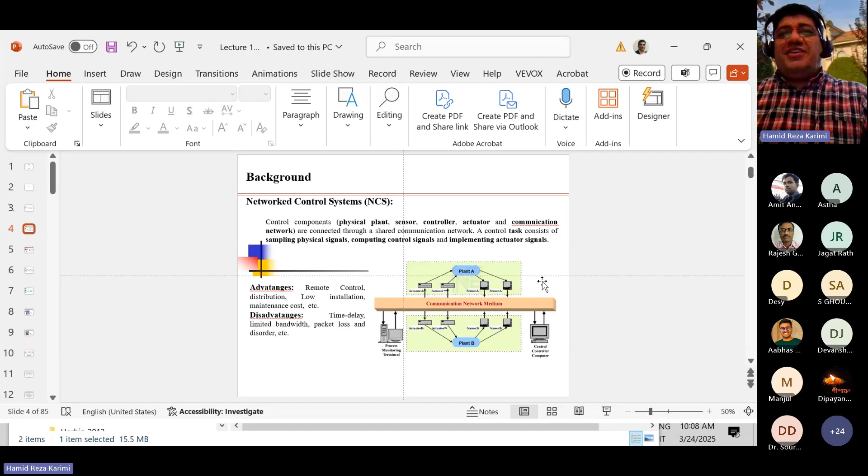Dear sir, you are unmuted but your voice is not coming. Okay, oh sorry. Let me ask you again: is my screen visible and can you hear my voice? Yes, now it is visible.

Okay, thank you. So I'll talk about NCS as a starting point. The NCS consists of a distributed plant and sensor actuator integration. The task of control consists of sampling physical signals, computational control design, and implementing the signal through the actuator as a control input. With this structure of a distributed plant, we get benefits like remote access, remote operation, remote control, distribution of the system, and perhaps low installation and maintenance cost.

Moving to decentralized control in the context of NCS, this is one of the emerging topics. But what could be some drawbacks in the NCS? There could be challenges coming from the networks, including time delay, limited bandwidth, and data sending issues. We should also expect packet loss, disorder, and so on. So the NCS potentially consists of some challenges, and the main research in this context is to mitigate these challenges through different control designs or scenarios.

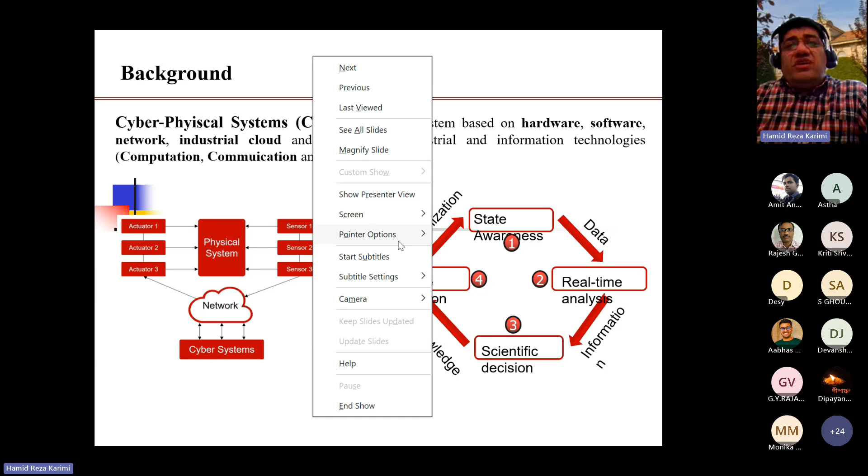The CPS system is also called a basic integration of the physical and the networks. We have issues about computation, communication, and control, very similar to the context of NCS, the network control system. Again, we have sensor positions, sensor selection, and we need to look at the physical system itself.

So the network also exists, and we have issues about cyber systems. If you look at the CPS, first we consider state awareness, data sharing, and real-time analysis, and this information should be sent to decision making for the task of system operation. So how the knowledge can be produced and circulated for better execution or operation of the system.

Of course, optimization is always a concern of the CPS. The circulation of the system operation for the CPS is based on the data, and this data should be transmitted through the networks and other physical aspects, including the sensor, actuator, and also the system itself.

So you can see that this kind of CPS potentially has given a lot of benefits from technology. At the same time, we should have a lot of concern in different aspects. The topic of CPS should be integrated with some other keywords, for instance resiliency and security. These issues become very important from the application side.

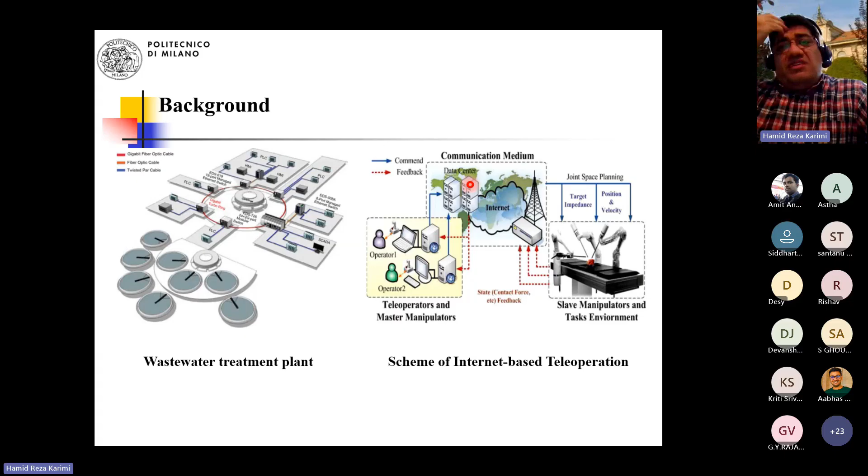In this context, data is transmitted through this communication channel, and we need to look again at the topic of CPS and other threats coming to the CPS, to see how the signal could be healthily sent from the master to the slave part. In all of these industrial applications, the security and resilience of the system is of high importance.

For this aspect, for the NCS or CPS, as we discussed before, there are three components: the plant, network, and control. The plant means we need to have information - information means the modeling. If you have the model of the plant, you can do good analysis for the dynamics in terms of stabilization, and also monitoring of the plant. Of course, this information is very expensive and sometimes it's not possible to obtain it in advance.

So the research in CPS and NCS is moving from model-based to data-driven approaches, and that's what my research group in Italy works on - data-driven control. In this scenario, all the topic of control design should be managed through data acquisition, and this is another research aspect.

The first thing we need to look at is network characterization, including network bandwidth, to enhance efficiency, and also look at some sort of network-induced constraints. Here I'm talking about delay, packet dropout, and quantization - how to sample the signal from the sensor to the network and then to the actuator.

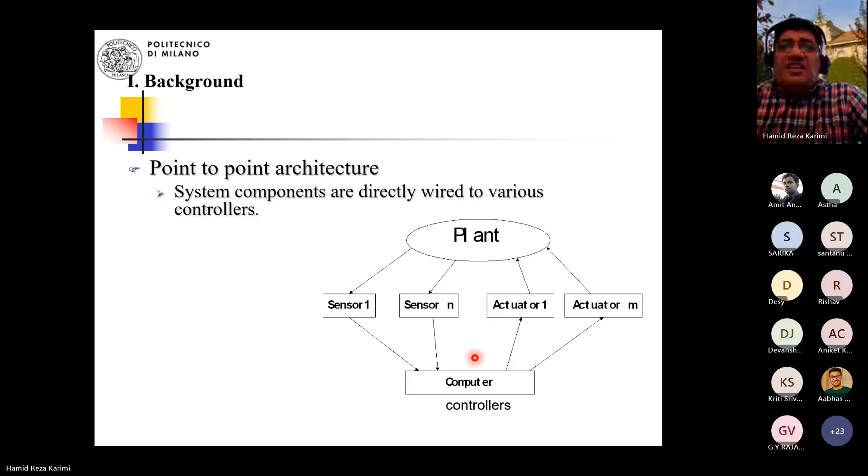Okay, so when we talk again about NCS, as I told you before, we have one part with a plant, a controller, and sensors/actuators. With respect to the traditional approach, we have a point-to-point architecture, meaning the system components are directly wired to the various controllers. This is the traditional wire-based point-to-point approach. But the development and history of control systems moved from analog control, to centralized digital control systems, to decentralized control, and also to fieldbus control systems and network control systems.

NCS as a keyword was introduced in 1998 by Professor Walsh. But already in 1988 we had the integration of communication and control. So the keyword NCS was introduced in '98, but in fact the integration of control and communication dates back to 1988. At that time, they discussed partly digital design, partly analog control, and also completely distributed control — these were some of the progress stages of control strategies at that time.

The definition of NCS is that it's a completely distributed and network real-time feedback control. So now we notice distributed plant and real-time control. It means the integration of the physical process, the sensor, actuators, and controller through communication networks. This integration should be done in real time, and the data transmission between devices is one of the key aspects of the realization of NCS.

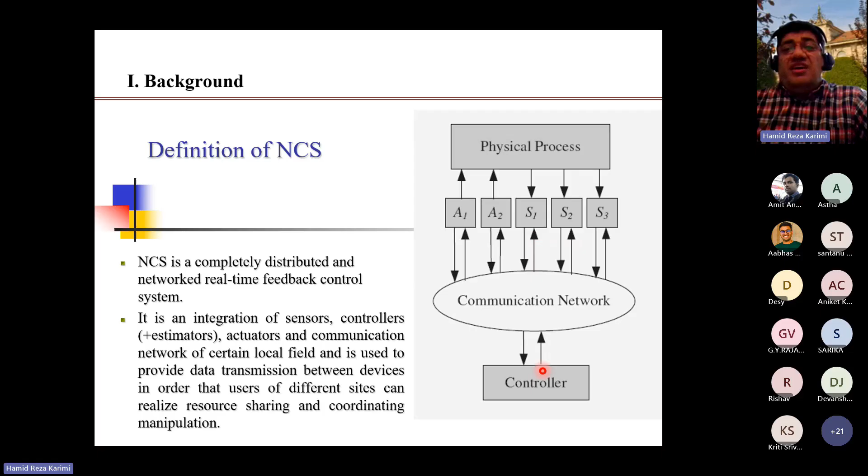So how we can realize resource sharing, coordinating, manipulation, and saving bandwidth. These are some topics we need to look at: the data scheduling from the sensor to the controller through the communication networks. So we have some typical NCS. This is a model of a network control system.

Again, we have this kind of plant, a controller, a sensor, and it comes to the network and is sent to the controller for computation. Again, the data should be sent back to the actuators. So this is a typical NCS, and at any position we have three parts: the plant, the network, and the controller.

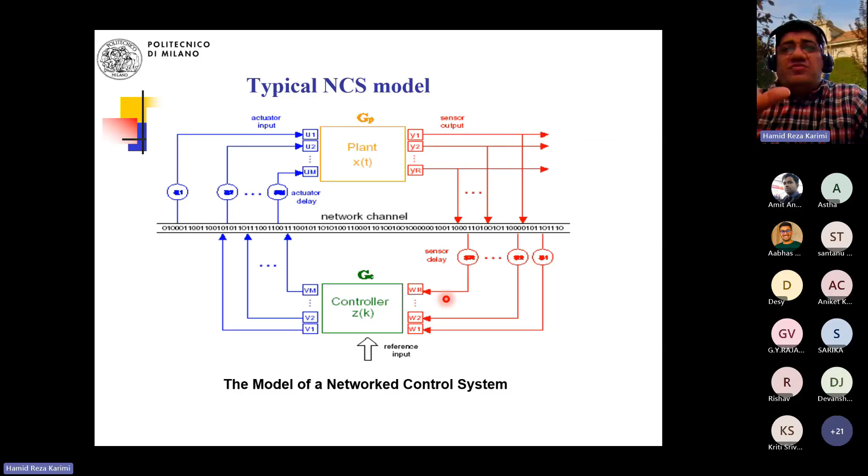The traditional control, as I mentioned before, is a point-to-point control, wire based. This is a traditional control diagram. But if you want to take it to NCS, it means we need to cut off the two data paths: from the sensor to the controller, and from the controller, once the signal has been computed, to the actuators. So this is a network-based control, meaning both the measurements and control signals are sent over the communication networks.

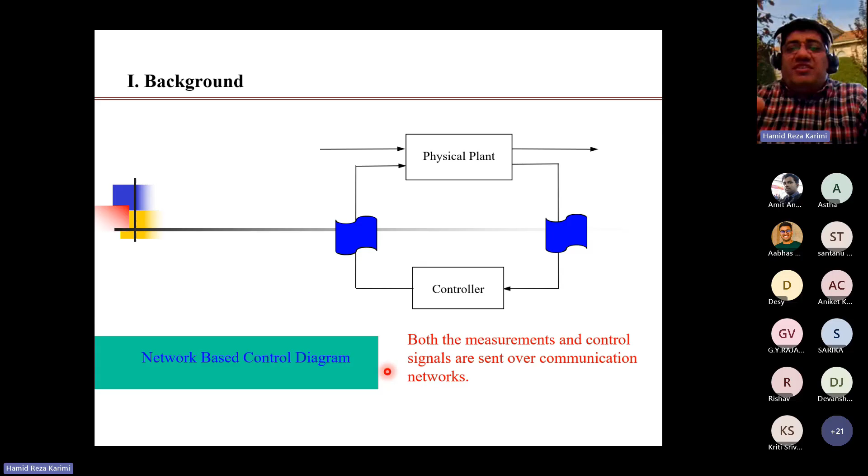Now you see that how the data acquisition and control signal are sent, and the network characteristics play an important role in these scenarios.

In these scenarios, the filtering part works such that if we have a better filter design, the error signal could converge rapidly to zero.

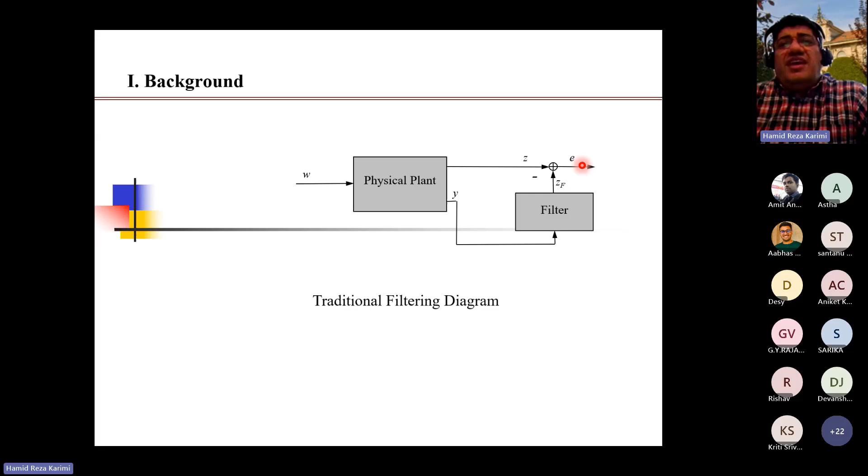The advantages of NCS with respect to point-to-point interconnected control systems: first, increasing system reconfigurability, meaning scalability can be enhanced. You can enhance resource utilization and reliability. Reliability can be enhanced in the context of NCS, because if you send less data with event-based control, system performance can be enhanced while saving bandwidth.

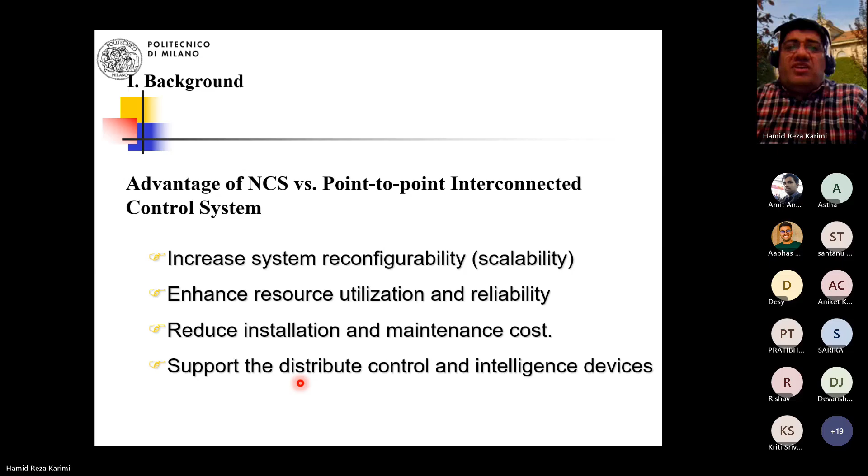It also reduces installation and maintenance cost, because for wire-based point-to-point control you can imagine how much cost goes into installation. But for NCS, you can minimize the installation and maintenance cost. It also supports distributed control and intelligent devices, meaning you can move to smart control, smart devices, smart sensors. Distributed control not only enhances system resiliency but also brings the opportunity to use smart devices. Based on these advantages, NCS becomes a very hot topic.

There is a lot of research you can imagine for NCS. If you look at the network system, network devices, and control system together, all of these bring some gaps for research. For instance, looking at the network control system through network systems, network devices, and control systems, we have a lot of issues about stability and performance, real-time processing, communication through control applications, and also timing analysis and modeling.

We can expect many issues for the NCS, and this is the reason that looking at this kind of research, we need to be specialized in some particular aspect, because the system relatively includes a huge amount of knowledge needed to look at the full control of the NCS.

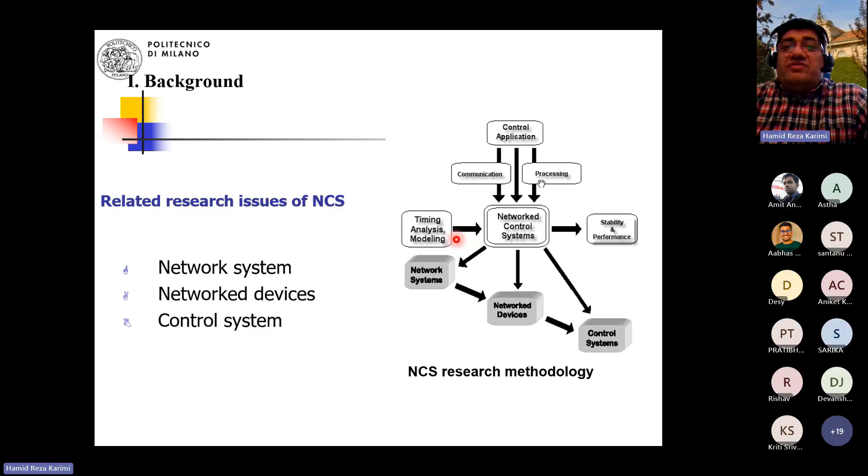The network system is classified as data networks and control networks. For instance, if you look at the data network, it depends on the size of the data packets. If the size in the data network is large, the frequency of sending data to the network is infrequent. But in the data network, the number of nodes is relatively small.

If you look at the control network, the size of the data packet is relatively small. You can frequently send the data, and also the system can be scaled up with a large number of nodes, and also you can fulfill the time critical requirement.

This means that in the NCS, the control strategy is very important, and this means that we need to pay more attention to this kind of control architecture.

If you are interested, you can also look at some other topics, for example about cognition. In addition to HMI, there is another topic, HMCI. Another topic could be, for instance, about cognition.

If you look at cognition, for example in robotics, this is another interesting topic. There's a keyword called HMCI, the human machine cognition interface. These are very important topics. Nowadays in Europe we talk about Industry 5.0. If you're familiar with Industry 4.0, in Industry 5.0 the topic is about HMCI. If you're interested, maybe we can discuss it later.

In the network device, as we discussed, we have a plant. Either you have a physical plant with a knowledge-based model, or if not, you have a data-driven model. You need to look at the sensor and actuator, basically the basic device information.

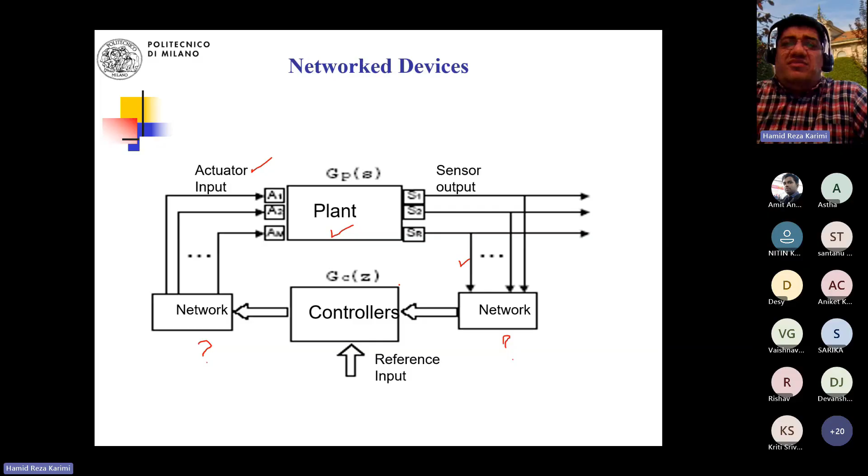There are two parts of the network: from the sensor to the controller, and from the controller to the actuators. These two parts bring some challenges to this kind of system operation. We will discuss it in more detail.

For instance, in the control system you can look at the direct structure. The direct structure means that the controller is between the sensor and actuator, which are on the same side as the plant, but only the data from sensor to controller to actuator goes through the network. This is basically the sensor measurement and control signal — we call it a direct structure, where the sensor, actuator, and plant have this orientation.

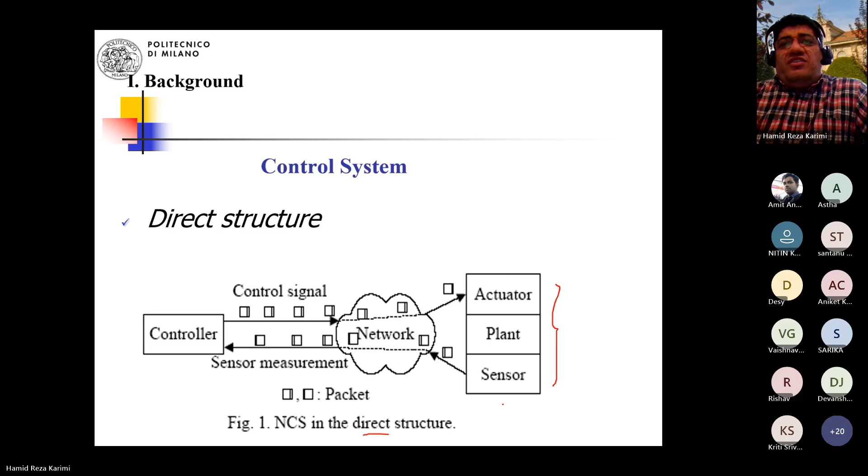But no matter which kind of structure we want to use, the challenge is the same: we need to look at the complexity of the networks.

In Italy, at least in our department in mechanical engineering, we have a very advanced laboratory. This laboratory is for trains. If you're familiar with the train system, each car has two components: the wheel sets. So there are two such wheel sets, and this device is called a bogie. If you're familiar with train dynamics, the name is bogie — you can search it. The bogie is basically for the transportation, for the wheel set of the train.

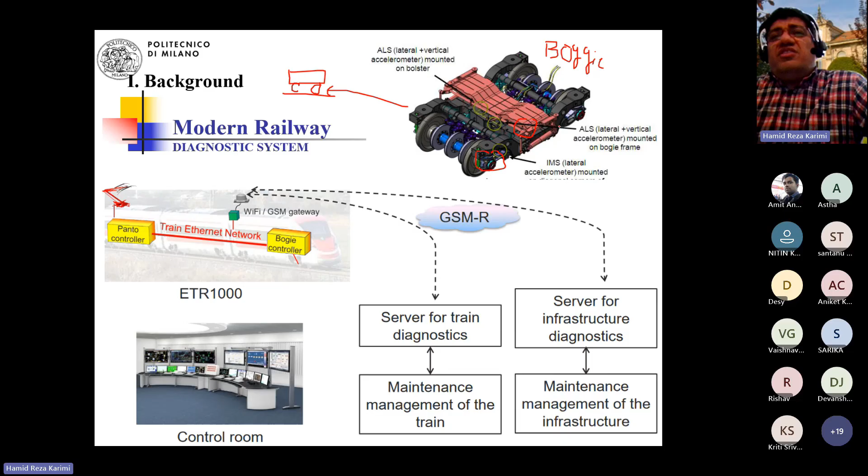India is now investing a lot in trains and intelligent transportation. One of the difficulties for improving technology in the railway is this device, because it has a lot of sensors and actuators, and mechanically it's very expensive. How to look at its operation and control is a very challenging topic. You can imagine that like a normal car, you know about the suspension system — this bogie has two suspension systems: one suspension here, and another suspension system connected to the car. Because of the complexity of this device, there's an issue of how to control it, and that's the topic of network control.

It's become part of the modern railway. If you want to look at research about diagnostics and monitoring, in Italy we are looking at bogie control and how to control this device. This is the pantograph — the pantograph gets electricity to the train, this is for power. Now in the modern railway, you have electricity coming from the pantograph to the train.

Here you have some Ethernet networks and some sort of control of this device. How can we manage this, because all the trains can be controlled from the control room, from the CCR. So now you need to look at how to control and also monitor diagnostics, and how to look at the operation of different components of this device.

If in India your interest is on rail and also on the technology for the train, specifically to look at the control or the cyber security for such applications, you are very welcome to contact me, because our laboratory is very advanced to look at the very complex challenges we have in this area. This is information for you, because I know India is now investing a lot on rail, and this could be one of the very challenging and important topics. Perhaps if you are interested, we can discuss in more detail.

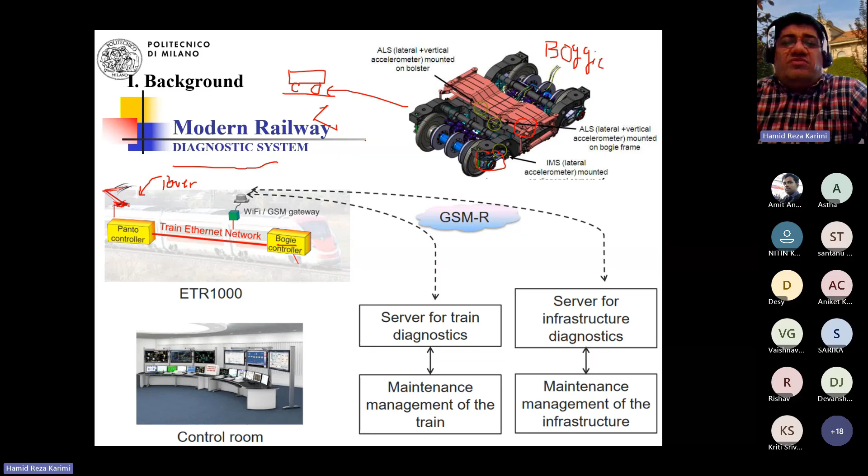Now you can see that in the topic of NCS, we have a lot of challenges. One topic is signal transmission delay. Another topic is the delay in communication due to buffering and propagation. Delays are bad for the control loop. Delays can be fixed or varying, either measurable or unknown.

Data packet dropout happens because the network is unreliable. The measurement is purposely dropped to stay within the allocated transmission rate, which we call congestion control. So you can see data packet dropout, congestion control, and signal quantization are some typical phenomena we have in the network environment. From delay to congestion control to signal quantization, we can highlight these three important phenomena.

When it comes to signal sampling, as we discussed, the data goes from the sensors to the controller to the networks—this could be normal sampling. It means we have some sample data, and these are three samples from your measurement YK, and this sample data can be sent basically to the controller node. So for example, here you have a signal YK, and this signal can be sent to the controller.

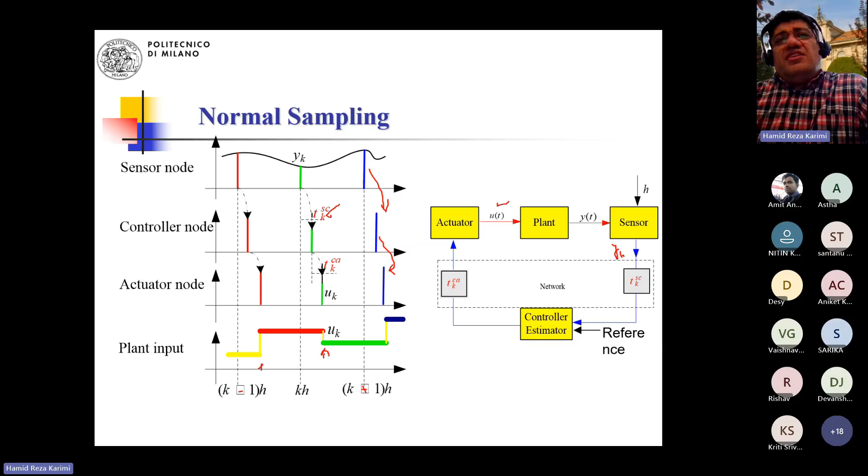Let's look at another sampling case: vacant sampling and packet loss. Packet loss can bring some difficulties, again based on your sample data—as we discussed before, this could be YK. Let's look at the first time delay, TKSC. Now you can see that if the TKSC is relatively large, basically for the first sample data, because the delay is time-varying.

So in these scenarios, in the network, we have a time varying delay. If this duration of the delay is relatively large, then in this sampling from k minus 1h to kh, there is no data, it's zero data. But here you have two data, one red and one green, and this means that some data has been lost - this is a packet loss in this sampling time. But the system cannot send this red signal because the system can send only the green signal to that position. So what about the red sample data?

So this data has been lost, and that's it. If you look at the control signal, for instance, here you have some vacant sampling. If there is zero information, it means the control signal cannot be updated, and that's it - the same control signal from the sampling k minus 1h remains. So in this sampling time, the signal is constant and not updated, and the signal can be updated only at this time.

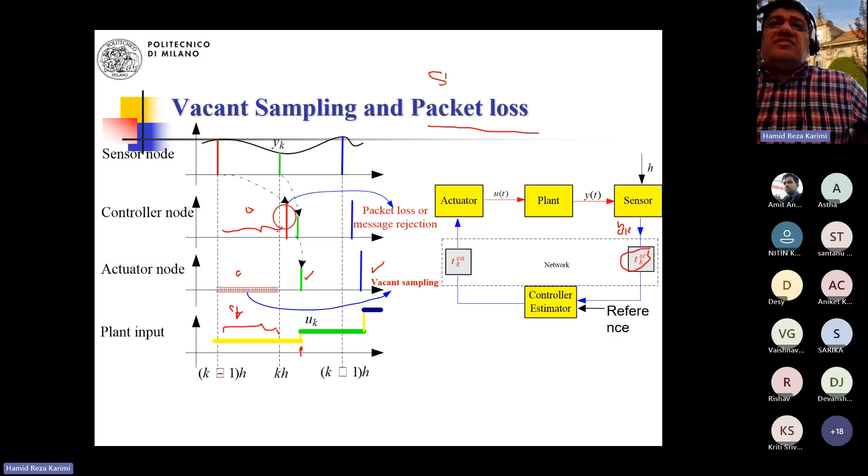So this is a challenge, and the first challenge is stability, because at this position, at this sampling, stability is a big concern - how to guarantee the performance and control stability of the system. There is no guarantee, and that's it. In the case of packet loss, an important issue is about stability, and we need to prove that the system can be stabilized. So stability is one of the challenging topics.

Okay, so now you can imagine the NCS challenges and the solution. So basically, there is one question. Yes, please. Do you have any question?

Sir, I had a doubt that in the previous explanation, when one data is getting into the arena of another data, so on the next step in the actuator node, how is it reduced to only one data in that time frame?

Okay, so good. At this sampling time, this red signal is a sample data coming from K-1H, but the system is ordering. The system can react to the green signal, because here you could expect some congestion of the data. So basically the system can react to the information of the green signal, because the red signal is out of use, and that's it.

For instance, if you look at the sensor data from the sensor to the controller, the green signal arrives at this position, and the system can react to this signal. This other signal, in fact, is some packet that has been lost and also rejected, because the network has a sort of delay.

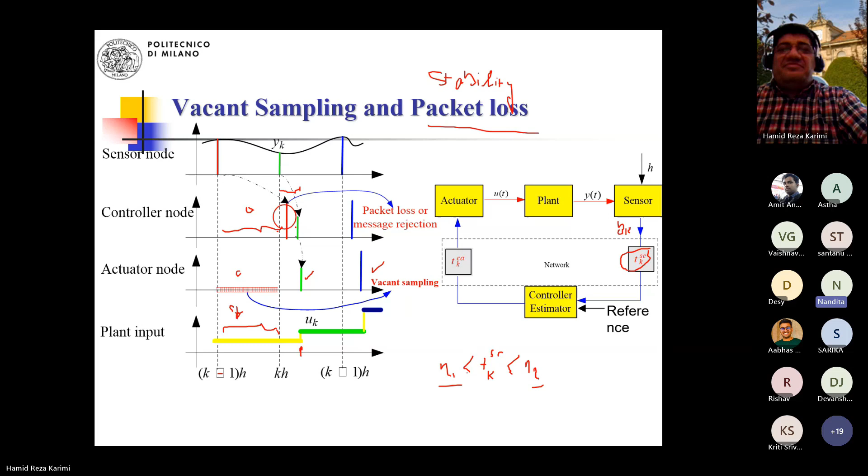So I think for the NCS challenge, based on the good question mentioned, you see that stability always comes first. We need to look at stability and also delay compensation. These are the two basic important topics that always come first.

And the second, after stability, is performance enhancement. It means we look at bandwidth allocation and scheduling. For this topic, I will discuss event-based control, which is a topic we have in this course.

So network security - I will give you one tutorial about security for connected cars, because in my research group there are some PhD students who work on cyber security for autonomous cars. I can show you some results about network security for cars.

Another challenge is integration of components and distribution of intelligence. These topics come to machine learning, AI, and how machine learning can be integrated to NCS. Of course, one of the benefits of machine learning is for monitoring, and that's it.

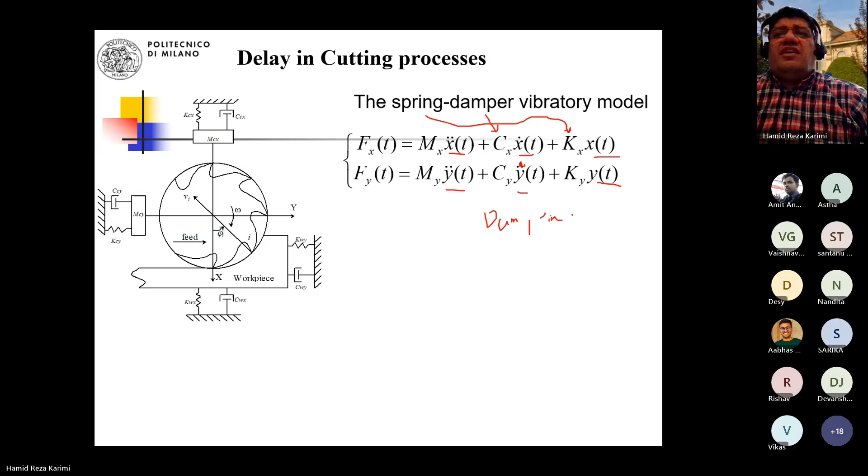So now here you have a damping - I can write it here. So you have a damping, and also you have a stiffness. So stiffness, basically, is for the parameter K. So a stiffness, okay?

Okay, so if you look at the two forces, Fx and Fy, based on this mathematical model, you start to look at how the surface can be generated. So here is the same problem, you see? Here you have a two forces, here you have a two forces, and this is exactly the same X and Y, and this cutter starts to rotate.

So at this position, if you look at this position, this is the tip position of the cutter starting to touch the surface. So this area can be modeled like this. This point means that the cutter touches the surface, but there is some oscillation, and this oscillation means the quality. If you want to get good quality for the surface, you need a much more soft, smooth surface. And why is the surface not good quality? Because of vibration.

That's the topic of the vibration - a very important topic. In this particular case, you need to know how to mathematicize the delay. One of you asked me about the delay. In this application, if you try to mathematicize the model about the chip thickness encountered by tooth, you can see there is some vibration at the touching point. So you can write a mathematical function for the deviation delta x. Delta x is x(t) minus x(t-T), and delta y is y(t) minus y(t-T). So now you can see that the delay, or the parameter T, depends on some parameters like rotational speed and also the number of teeth.

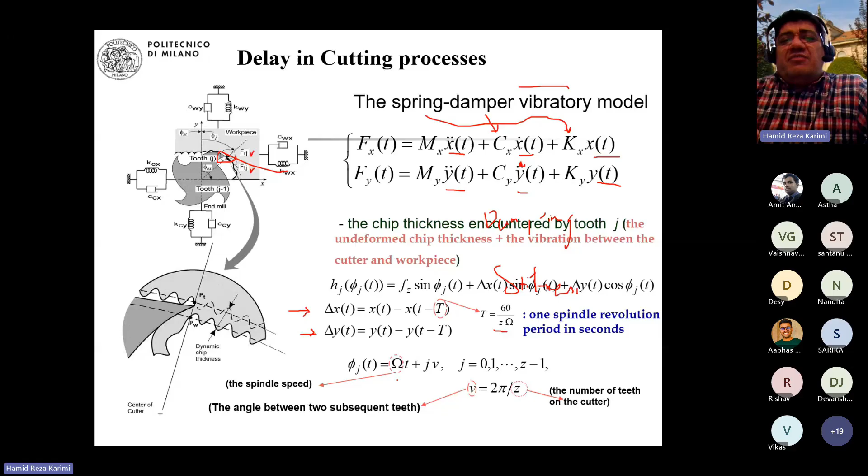So one source of the delay could be the network, or could be some issues about vibration. And this example was exactly presenting this point.

So for this cutting process, if you want to make a model, here is a dynamical cutting force. This is a mechanical model, as I showed you before. You have a two force Fx, you have a force Fy. But the point is that you can develop this, because the model is fully nonlinear, and then based on the vibration and the cutter, you can get the two forces.

In this transfer function, you can see that a sort of delay is appeared as a parameter T, because my focus is about the T. So this delay is appeared in the sampling time. In the Laplace transform, you can get this exponential term.

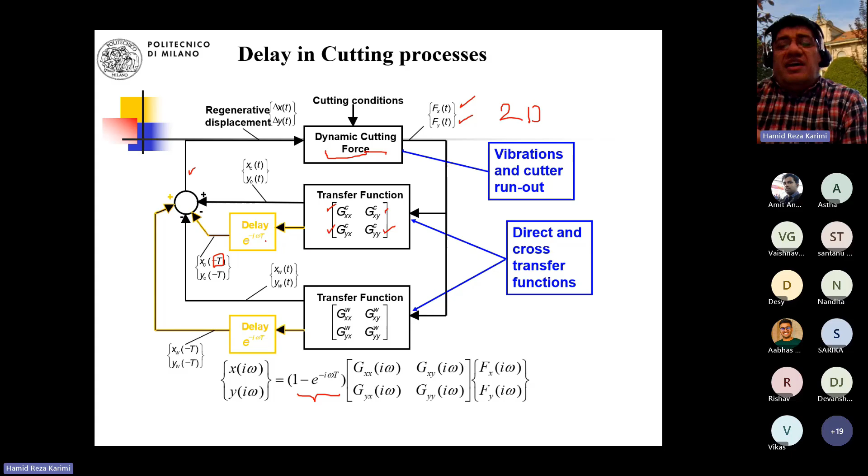And then the next step is to design the control. This was one of the projects we did some years ago. If you're interested in some application in this area, you can contact me.

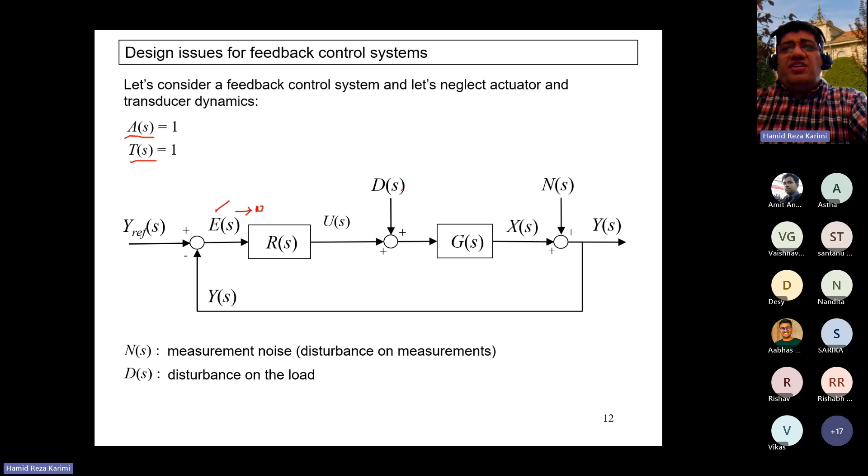For this particular case, if you want to start to analyze, there are several transfer functions you can obtain. The first is the signal X(s), which you can calculate from this function, and you can also obtain the control signal U(s) from this function, and Y(s) contains the noise. If you look at this model of the system in the Laplace domain, in the frequency domain, you can see that the noise appears here, and also the disturbance D(s) also appears in your case.

Now the important thing is that if you want to get a better control signal U(s), your control signal should mitigate the effect of the noise and the effect of the disturbance. But the problem is that the noise appears in the information Y, and that's it - the amount of the noise, how to look at the noise compensation. This is one of the challenging topics we have in the design issue.

The point is that for this system with three inputs - we have noise, we have disturbance, and we have a reference signal - there are three pieces of information as input signals. Then the relation between the three information and the three outputs, one is X(s), and also Y and also U(s) - these are the three interested signals. One interested signal is the state of the system X(s), another is the measured signal Y(s), another is the input signal U(s). The point is that here you will get 9 transfer functions, because in this system, in total you have 9.

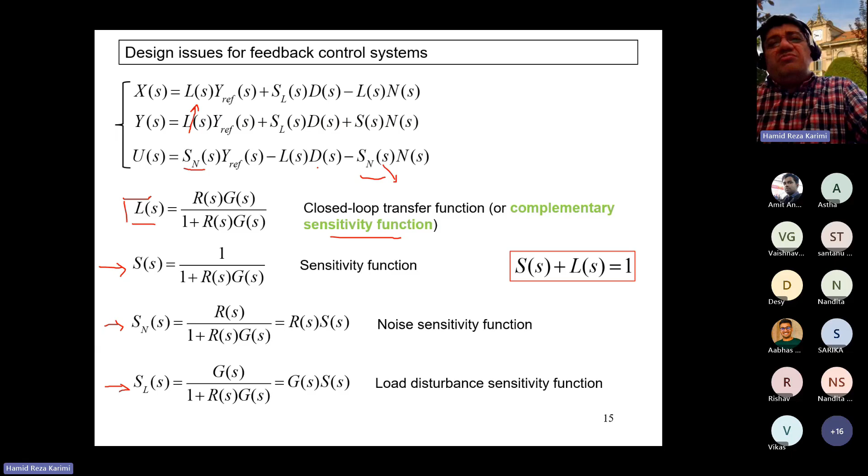So what should we do? We need to look at the four functions. One is the transfer function LS, which tries to bring the reference signal to Y for the tracking. You need to look at the two sensitivity functions, for the noise and the disturbance. And there is another sensitivity function that gives the measured process response YS relative to the measurement noise NS. So now you need to pay attention to the four functions in the frequency domain.

There is some conceptual background coming from Bode. If you look at Bode's statement, he wrote his thesis in 1945 and published his first state of the art work about network analysis and feedback amplifier design. So Bode, in 1945, introduced the topic of this function.

This is a basic, simple case to find the trade-off between the basic sensitivity function and how to manage it. Bode says that this function, integrated over the frequency, should be zero, and that's it. This should basically be the one solution to satisfy the performance of the system for the sensitivity function.

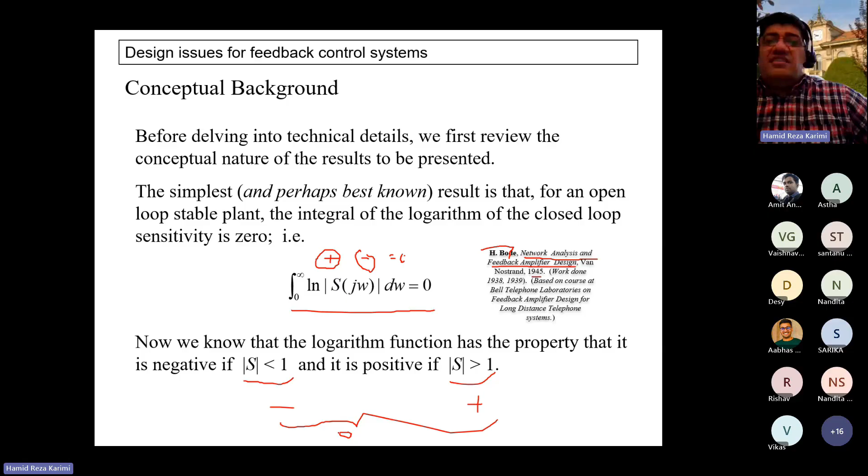But if this function becomes zero, you can see that it's an Ln function. It should always be positive in some range and negative in another, and then in total this becomes zero. So to see when it's positive and when it's negative, it depends on the length of S. If S is less than 1, or if S is bigger than 1, here you get negative and here you get positive, and in total you get zero. So these scenarios work, and this is what we call finding a trade-off, to check the performance of the system. This is exactly the task for the design.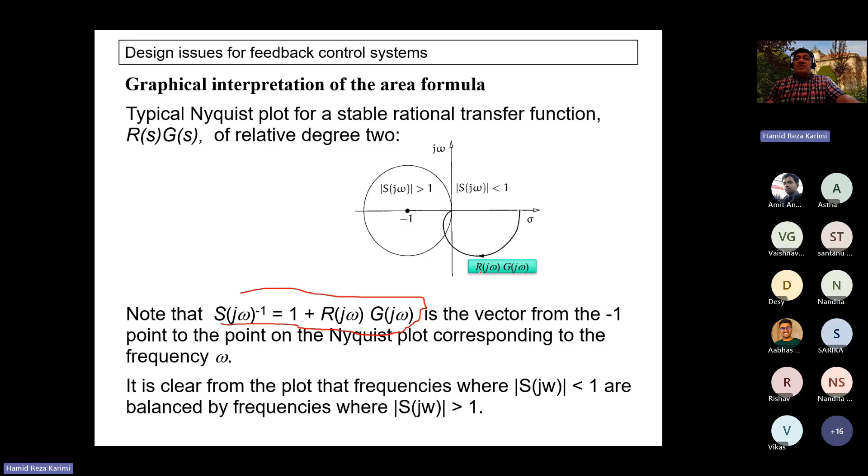But if you look at this problem from the root locus, in the frequency domain, in the Nyquist plot, it shows that the sensitivity function S, for example, in this area is bigger than 1, and in this area is less than 1. This is the Nyquist function basically for R and G, because as you know, S is this function, and S inverse is this function. Based on the plant and the controller, outside the Nyquist plot the norm of S is less than 1, and inside it is bigger than 1. So in these scenarios, you need to find the optimal parameter R, and see at which frequency you want the norm of S less than 1, or at which frequency you want it bigger than 1.

So this was some conceptual background about sensitivity analysis, but because of time I want to go a bit faster. You can see that here we have a sort of waterbed effect. The waterbed effect says that the magnitude of the norm of S, in this area should be enhanced and in this area should be reduced, because here you have a peak in the S function.

This effect, if you want to improve it, is like a waterbed effect. It's like sensitivity dirt: if you remove the dirt from one side, the dirt goes to another place. So how do you find a trade-off? This is the task of control design.

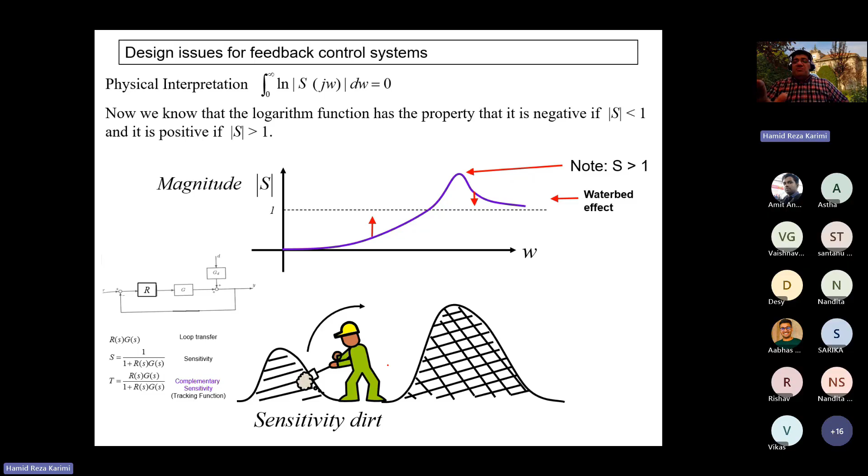This means we need to pay attention to how to manage this function S. Regarding the disturbance on the load, we have this block diagram. First, let's assume there is no noise.

For the parameter ds, you can find the relation between the measured signal and the state of the system, and also the relation between the reference signal and the disturbance, based on these two functions L(s) and S(s). The R(s) control signal appears in both functions, as I showed you before.

Now the point is, if you want to minimize the effect of the disturbance on the design, we need to pay attention to how the robustness of the feedback control system to the disturbance can be evaluated. Since the system is linear, you can impose the superposition principle.

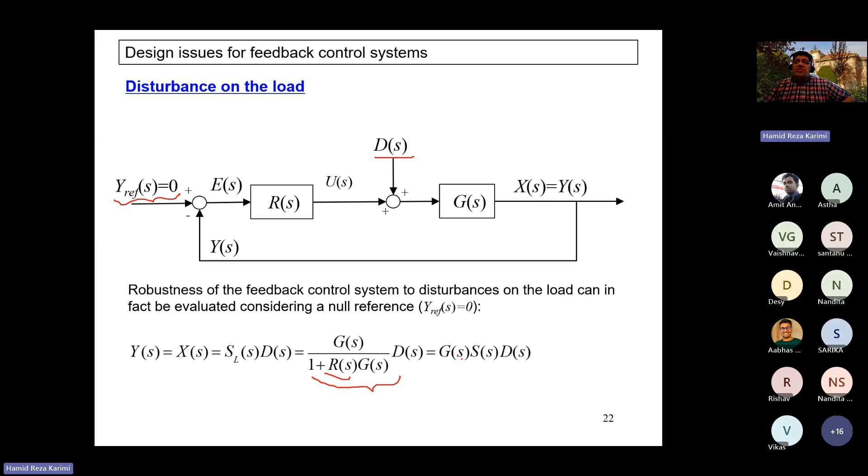First, assume that the reference signal is zero and you only have the parameter ds. The formulation between ys, xs, and ds becomes like this. If you look at this mathematical model, you can see that rs appears here. This function can be written as g(s) multiplied by s(s), because s(s) is exactly 1 over 1 plus rg.

In this scenario, if you see how the control R can affect this performance, you can discuss the function s(s) to get a better understanding of disturbance reduction. If you look again at the same formulation I showed before, ys was like this: g(s), s(s), and ds.

Now the point is, if the norm of R multiplied by G is bigger than 1 — if rg increases and is bigger than 1 — then you can see the function L(s), because rg increases, approaches 1. L(s) approaches 1.

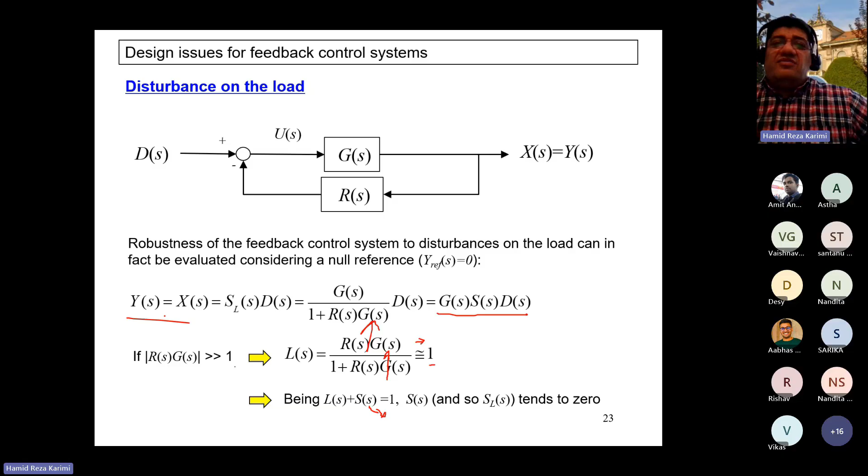What does it mean? It means that S(s) is moved to zero. In this scenario, the effect of ds over ys can be reduced. This is one thing we need to satisfy.

Let's look at a simulation result. Assume you have a plant G(s) like this mathematical model — a model for one spring, mass, and damping system. If you look at a system like this, there's a mass, a spring, and also the damping. Looking at the mathematical model for the motion of this, this is the mass m.

If you look at the position x for this system, it can be modeled like this. The model has mass m, stiffness k, and also damping c. For this system, you can write this function G(s).

Let's assume you want to look at stability, for the underdamped signal, in the one-dimensional system — meaning this system is one dimension.

Assume you design the control R(s) as a PD control. The PD control is modeled as R(s) equals KP multiplied by 1 plus TD*s. This is the model of the PD control.

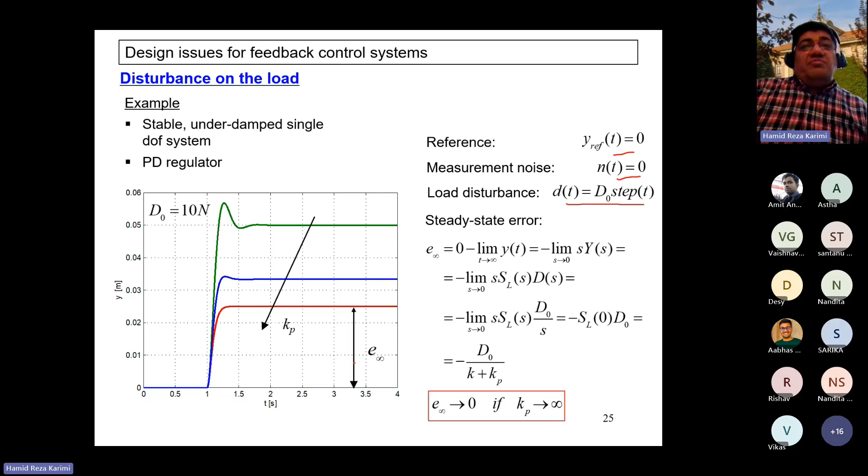Of course, you can look at other effects, from the feedback control compared to the feed-forward control. Here I discussed the feedback control and introduced L and S. At the same time, you can also add the feed-forward control.

The feed-forward control means that if you have a plant G(s), you can apply the inverse of the plant, and then you could get exactly the same reference signal in the output, but only if there is no disturbance.

But here there is some challenge. What should be the feed-forward plant? One case could be the inverse of the plant. But of course, please pay attention that in many cases the inverse of the plant doesn't exist.

For example, if the plant G(s) has a non-minimum phase zero, like this: S minus 1 over S plus 1. This system is basically non-minimum phase, because if you look at the root locus, here you have one zero.

On the right side, it is at 1. At the same time, you have one pole at minus 1. So this system, we call it in control NMP. So this system is NMP, meaning non-minimum phase zeros.

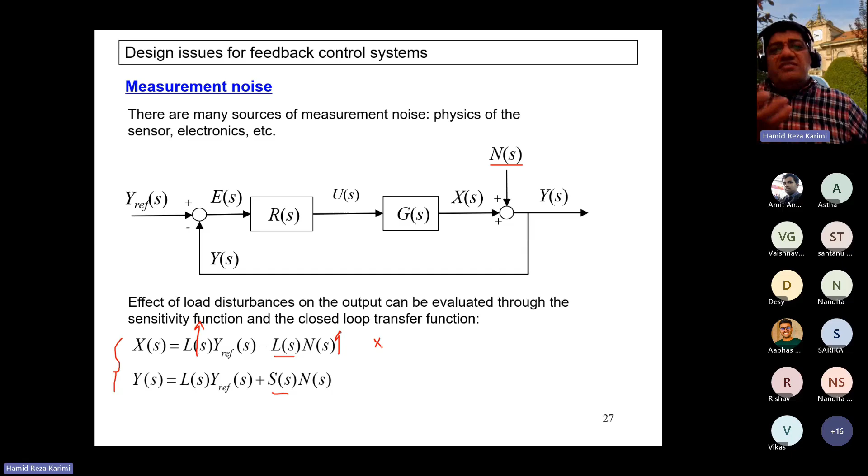Now the question is, if you want to satisfy the tracking, L(s) should increase. But if you increase L(s), you can see that the effect of the noise is also increased. So this is the problem. Now the point is how we can find a solution for these scenarios.

In this case, let's assume that the reference signal is zero. Again, you can see the relation between X and the noise can be written like this mathematical model.

This mathematical model says that X is minus L(s) N(s), and Y(s) is S multiplied by N(s). So the system response is affected by the measurement noise because the system response Y depends on the noise, and increasing the control gains amplifies the measurement noise. If you increase L(s), the effect of the noise also increases.

So the system response is highly affected by the noise, and this is one challenge. You cannot increase the control gains because you get the effect of the noise.

For the same example, for the same one degree of freedom system, if you apply the PD control and start to increase the KP, you can see that LS increases at the same time SS decreases. But what is the problem? Maybe you can notice that at this position, if the KP increases, the SN also increases.

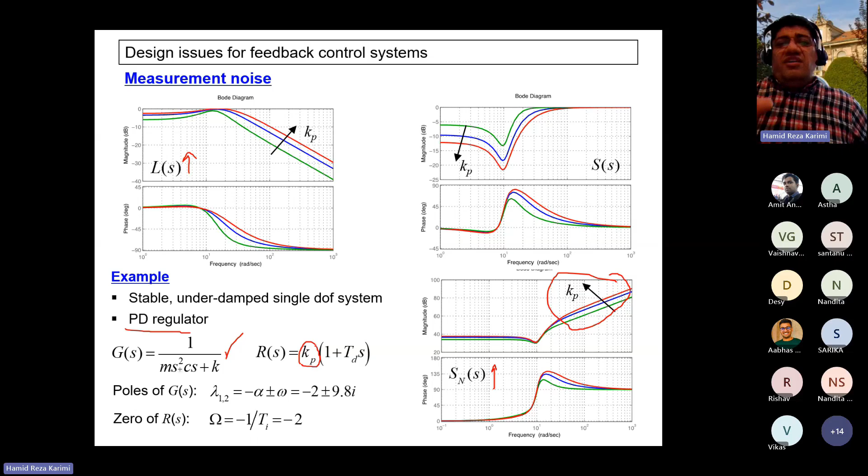At the same time, for this case, because of the PD regulator, as I showed you before, this time I selected the noise like a step signal, N0 step T. For this case, if you look at the steady state errors, you can see that by increasing the KP, the error moves to N0. It means that by increasing the KP, you reach to one error signal like this. It never becomes zero.

That's it, by increasing KP the error never becomes zero, and why? Because in your result, noise always exists. This is one challenge that you need to change a strategy if you want to get a better KP.

Again, here you can see that for the measurement noise, this also brings some problem about the saturation, because if you look at the control signal US, it is minus SS multiplied by NS. So if the control, or the KP, increases, you can see that the control signal has some spikes that also increase, and this brings some saturation.

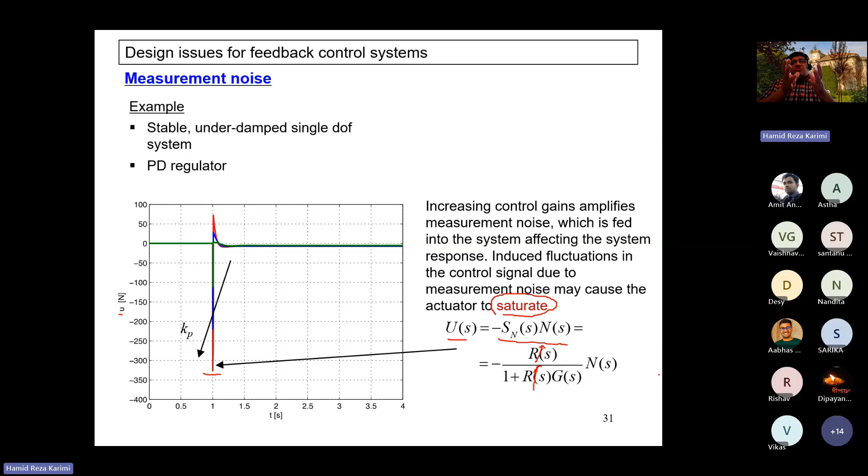Yes, exactly, I think about your question, you are right. Because here we have three players: two players are the bad players, noise and the disturbance, and the third player is the reference signal. So here, if you want to look at the control design, you need to look at the nine transfer functions, because at the beginning I told you that for this problem, you need to look at these nine functions.

So the question is that if, for example, you choose the PD control, and then if you try to play with the KP — if you increase KP, then you can see that RS increases and also this increases. And LS, this function, moves to 1. At the same time, this makes a problem because this also moves to 1.

That's it, the noise has a direct effect on the state, and it also brings some issues even for the control. I showed you that by increasing the RS, you should expect the saturation problem, and also you will get noisy data in your state measurement. So what should we do? We need to pay attention to two things.

Important is how much disturbance or noise exists, and also the type of control. Even if you have noise, for example, you never get the error to zero in these scenarios—error always exists.

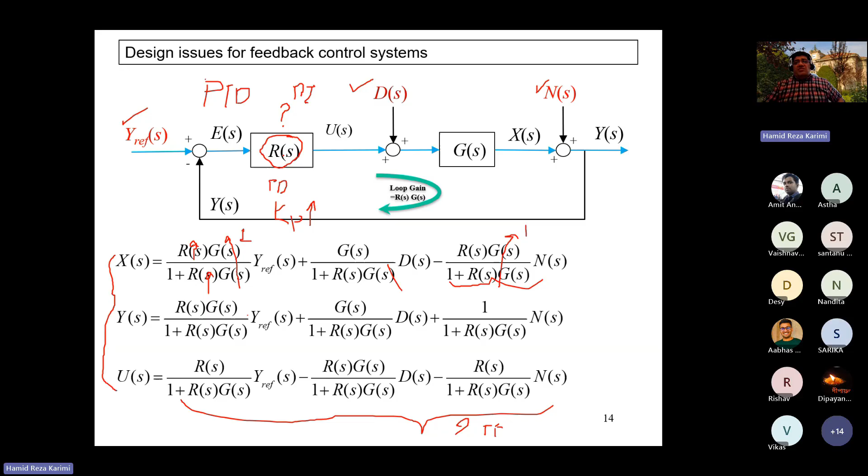So now the question is that selection of the regulator is very competitive because it can directly manipulate the effect of the noise and the effect of the disturbance. At the same time, your target is tracking, for example. So in this case we need to pay very close attention. This question always exists in control design, and of course there are some other issues.

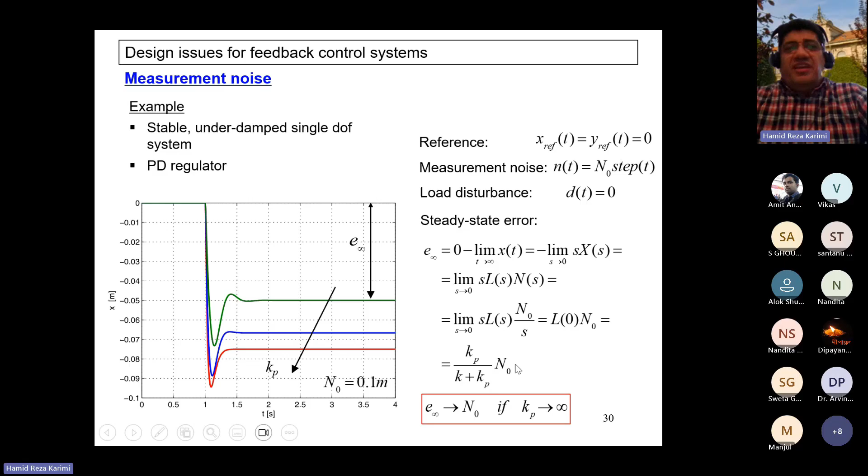And in the linear system, basically we are dealing with nine transfer functions. Then we started to look at some particular cases. This is what we discussed before the break.

If you look at the measurement noise in the context of feedback and also feed-forward control, we need to look at two functions: one is the state, one is the measured signal, YS. We notice that in the existence of the reference signal, both the noise and the signal exist.

This is a challenging topic because if you want to increase LS, the effect of noise also increases. This is a big challenge based on the state. Also, when it comes to the measurement signal, we need to pay attention to how to increase L and how to decrease S. These are the issues in feedback affected by the control parameter KP.

So for this particular case, the feed-forward control has no robustness with respect to the noise, so you need to look at the robustness with the feedback part. But what's the benefit of the feed-forward control? It's just improving the performance, and this basically doesn't affect the stability.

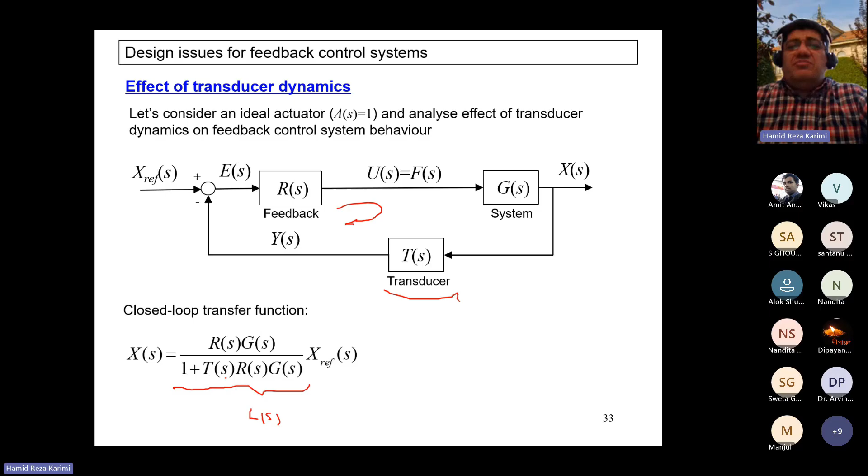So I'll give you one example about the effect of the transducer dynamics, or the sensor. This topic is about sensors. In the sensor, one parameter is about the delay. Assume that this is your physical plant, this is your controller, the control is a P control, a P regulator.

So the function Ts appears as exponential, e power of minus tau s. It means you have such a delay as a parameter tau, and if you give the sensor the state x(t), you will get basically x(t) here, and here you will get x(t) minus tau. So now the delay appears basically in your output.

So the function is e power of minus tau s, and when it comes to linear analysis, we need to approximate it. One approximation for e power of minus tau s is 1 minus tau s. So when you approximate this function by the linear form, then you can see how the delay appears.

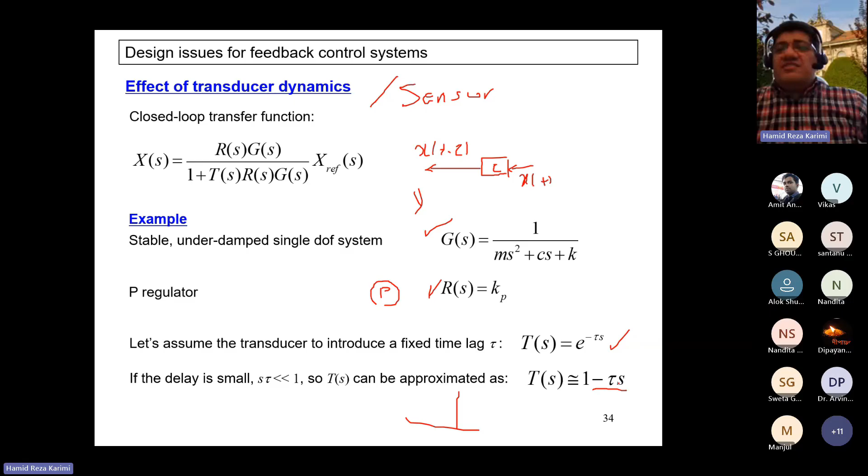But this parameter brings a lot of difficulties, because it gives you exactly the zeros. If you look here, this gives you one zero at s equal to 1 over tau, and I can explain this to you later on.

But let's continue. If you look at the function Ls, the loop gain Ls, based on R, T, G, you can calculate it from this expression and you will get this function. In this function, you can see that the stiffness becomes k plus kp if you're using the P control, because here the regulator Rs is a P. And then the damping becomes c minus tau times kp.

So in mechanics it's very important: if you're adding delay to such a sensor, the damping decreases. So if the damping decreases because of the effect of kp and tau, what's the problem? The problem is that if the damping decreases, the phase margin decreases. If the phase margin decreases, the system potentially becomes unstable for large kp. It means that if the gain kp increases over a certain value, the system becomes unstable - this is instability.

So now this is very important. Because of the delay tau, by increasing kp, the damping goes down. And if the damping goes down, the phase margin in control also decreases. So if the phase margin decreases, stability also decreases, because for some certain kp the system becomes unstable. This is exactly the problem why the delay is a challenging topic. So now you can notice that by having a small delay, the system stability becomes questionable.

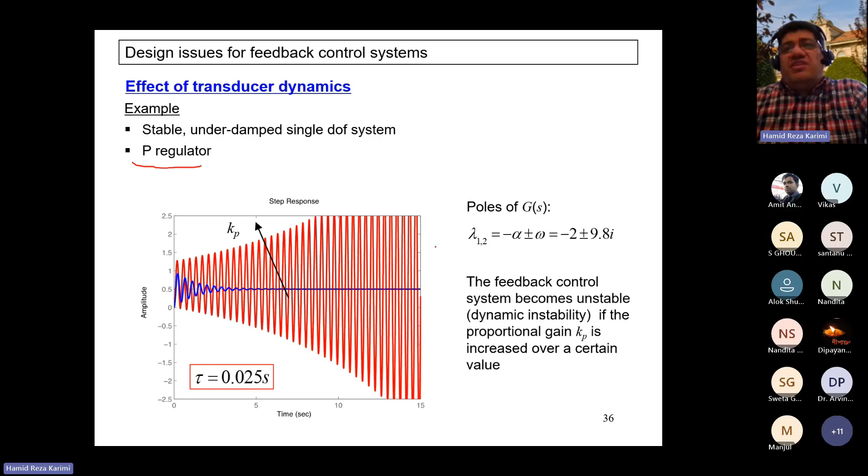So as a summary, we talked about two functions: the sensitivity function S, and the complementary function L. The summation is 1, meaning that if L increases, S should decrease, and that's it. We need to look at the load disturbance attenuation effect - how SL can be attenuated. You need to look at how measurement noise can be handled by S and L, and these functions should also be controlled.

So now the question for you is: if you want to do tracking, if you want to only reduce the noise effect, or if you want to only reduce the disturbance effect, what kind of control with which parameter of Kp, Ki, Kd. This is traditional control, basically we have for the physical plant.

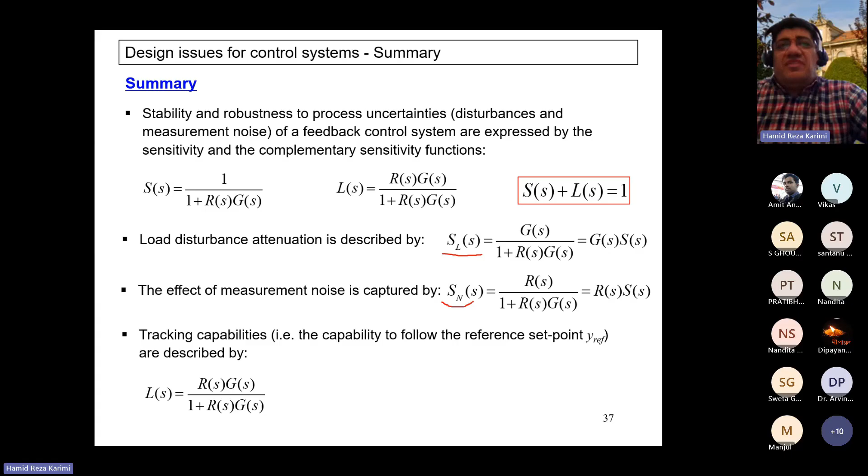Okay, so we notice that delay is an important part, especially the sensor delay. And then you need to pay attention to how to look at the function S to improve the performance.

Another important topic we have in control is the combination of feedback and feed-forward control. Usually in all the control textbooks, they focus on feedback control. But in the future, if you do some project related to the oil company or oil and gas business, most of the industrial plants in the oil company are based on feed-forward control. So you can see feed-forward control is also important from an application and industry standpoint. It's good to know how to combine feedback and feed-forward control.

Okay, so I think I can skip this part. I could provide you this example, but because of time, I'm going to move to the control strategies.

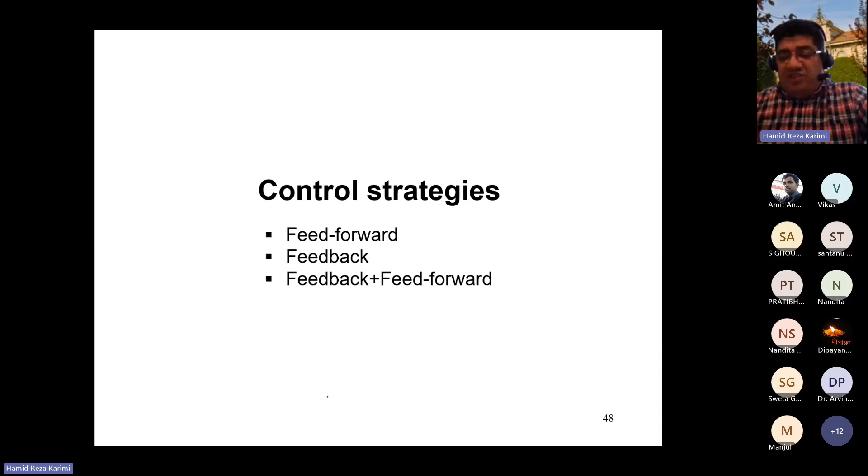So in the control strategies now, we have feedback, we have feed-forward, and we have feedback and feed-forward control together. I'll show you some scenarios of how we can reach the combination of feedback and feed-forward control.

So if you look at the hypothesis, the system is stable, and we are looking at the underdamped single degree of freedom vibratory system. Underdamping means that the damping factor, psi, should be less than 1.

The objective is fitting in the mechanical system with the force FC. We need to design the force FC such that this mass follows the reference signal Z_REF. We want to see how this mass position, the center of gravity of the mass, parameter Z, can follow the reference signal Z_REF. This is basically our target.

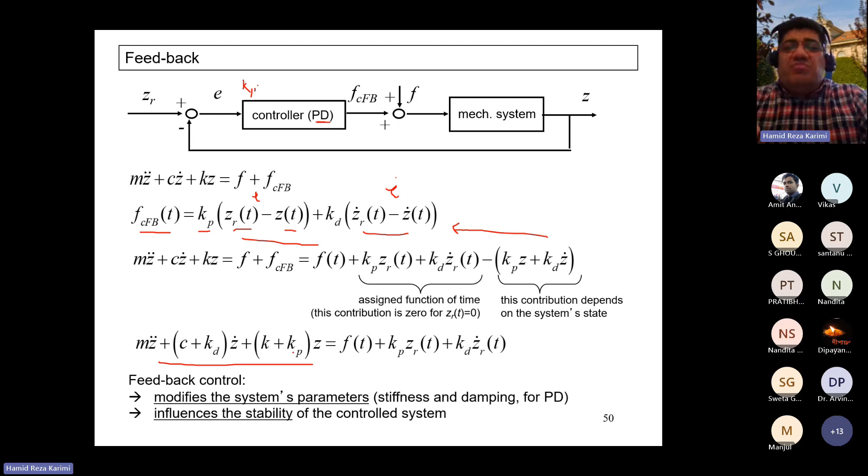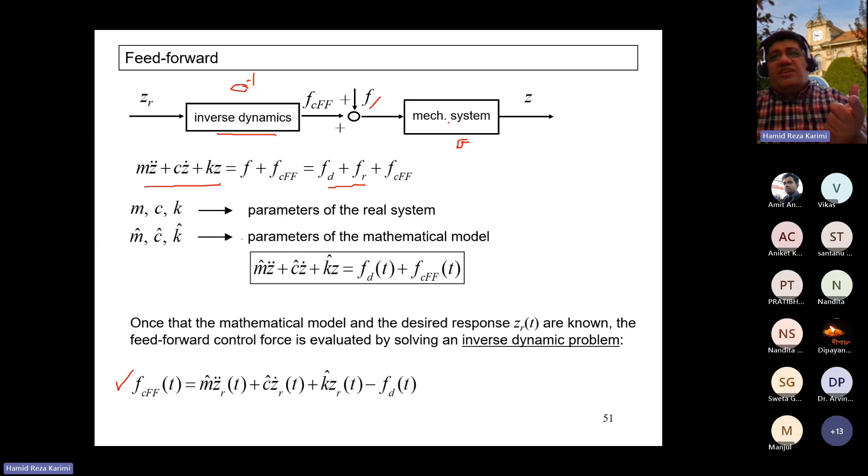And this could be your inverse dynamical model. And then you can combine this inverse dynamics with the mechanical system. And here you have also additional force F. This force F, remember, is F equals FD plus FR. And the FD is coming basically from the inverse dynamical model. And then if you add it together, I will show you in the next slide how to combine it.

So it means that for your first system dynamics, you need to substitute FCFF as a feed-forward control, basically from the previous slide. So this is your FCFF. You can put it here. And then this kind of disturbance also goes with the disturbance you have here.

With this disturbance FD, this can be removed, and then you can write this mathematical model. In this mathematical model, you can see that there are some changes basically in the change of the mass, in the change of the damping, and also in the change of the stiffness. And basically there could be some mismatching between the parameters.

So, okay, let me try to change my mouse just a moment. So basically...

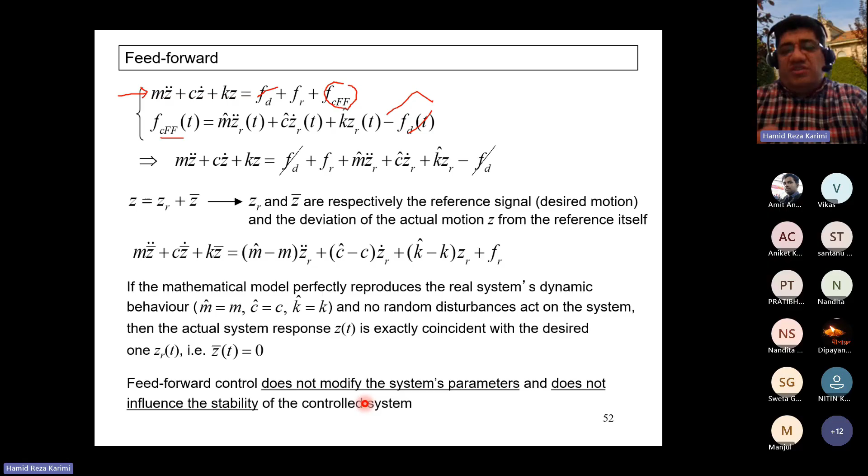So the feed-forward control does not modify the system parameters and does not influence the stability, and only the feed-forward control can affect the performance, and that's it. So one question in all of this design is how to choose the parameter and also what are the effects of this parameter on the overall performance.

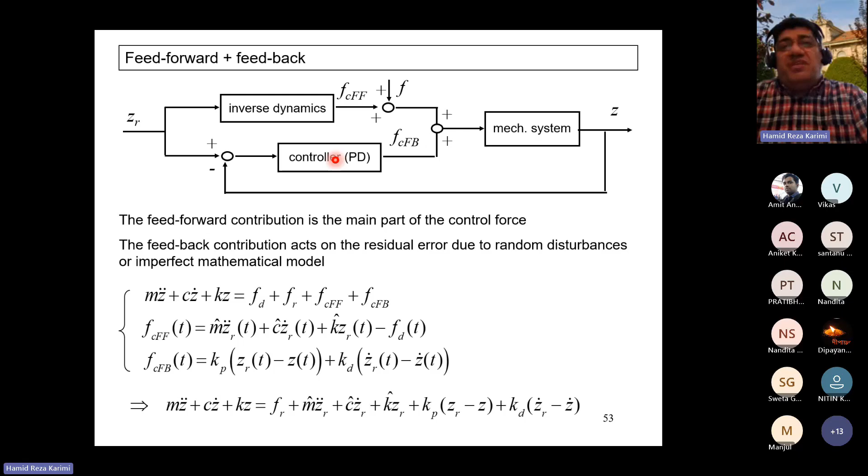So if you want to do this, you need to write the mathematical model for these scenarios. Here we've used PD control, but you can use a different control, like sliding mode control, and see what the result is. This is the question I usually ask students - they're free to choose different controls, but of course we can start from PD first as a baseline classical control, and then move on to other controls.

So the very important conclusion is this: if you combine feedback and feed-forward control, pay attention that feedback control tries to change stiffness and damping. This means you can enhance stability. On the other side, if you use feed-forward control, you can add an additional term for better tracking and better performance of the system.

It means you have some mismatching between different parameters, so combining feedback and feed-forward generally allows you to obtain the best system performance. If you go to industry - I always mention oil companies because I've done many projects with them - they're mainly interested in feed-forward control because it's very simple, and they can still get good performance. But what about stability? In that business, stability is always guaranteed so there isn't much concern.

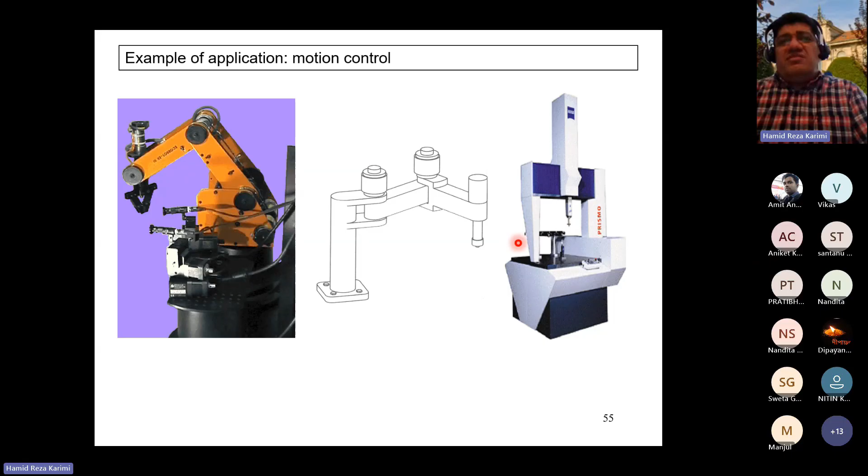If you want to satisfy the tracking, you need to pay attention to whether you're using PD control or another type of control based on what I presented. At the same time, there could be some loading or disturbance on the plant, so we need to pay attention to the effect of this kind of disturbance.

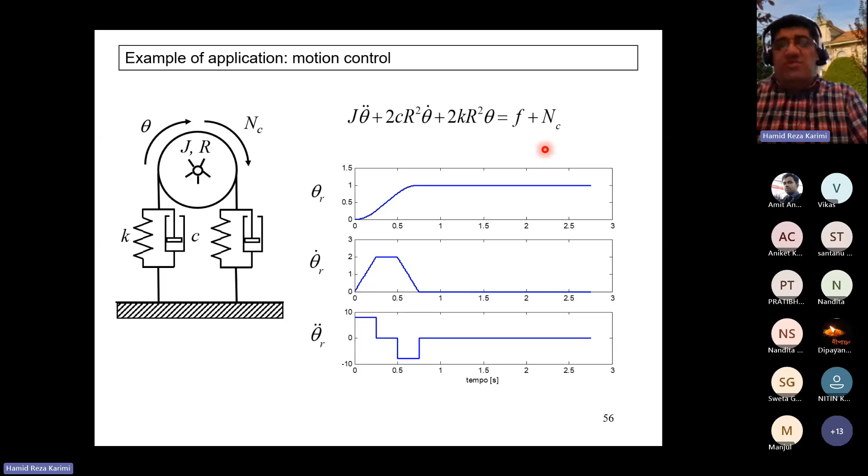For this model, if you want a rotation theta for the position, based on this control signal - for example if you're doing feed-forward control, as I told you before - for this dynamical model for the rotation of the pulley with inertia, damping, and stiffness, you can obtain this feed-forward control with J hat, C hat, and K hat. The shape is the same - you see the same mathematical model, but with different parameter values.

If you find the transfer function, you can apply the feed-forward control to the system like this: your reference theta to the final theta, and if there's no external force, you get this mathematical model. If you have perfect matching - meaning J hat equals J, C hat equals C, and K hat equals K - you get perfect tracking. But if you don't have perfect matching, you cannot achieve perfect tracking.

So to design the feedback control, you can use PD control. If you design the PD control like this, you obtain the same transfer function. What happens here is that in this function, you can see the effect of KP and KD on your stiffness and damping, meaning stability can be improved. If you combine it with feed-forward control, you can also enhance performance.

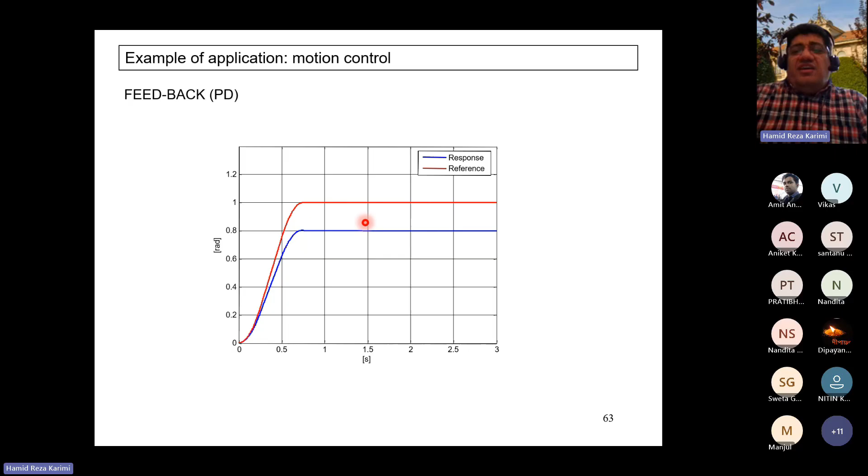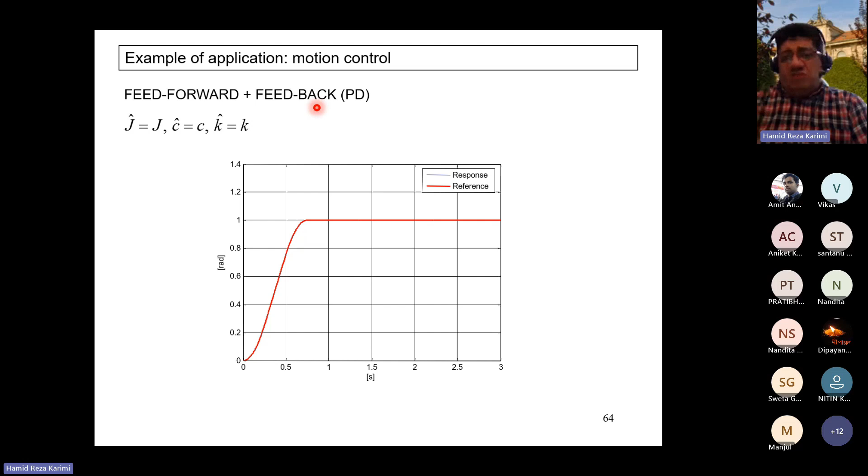If you have this underestimated stiffness and you apply the feed-forward and feedback together, you can get a better result. But if you have a better estimation, you get a better result. This means knowledge - if you have good knowledge of the system, you can get a better design. But if you have less knowledge, you are always in the underestimated case, and the performance never reaches the ideal case.

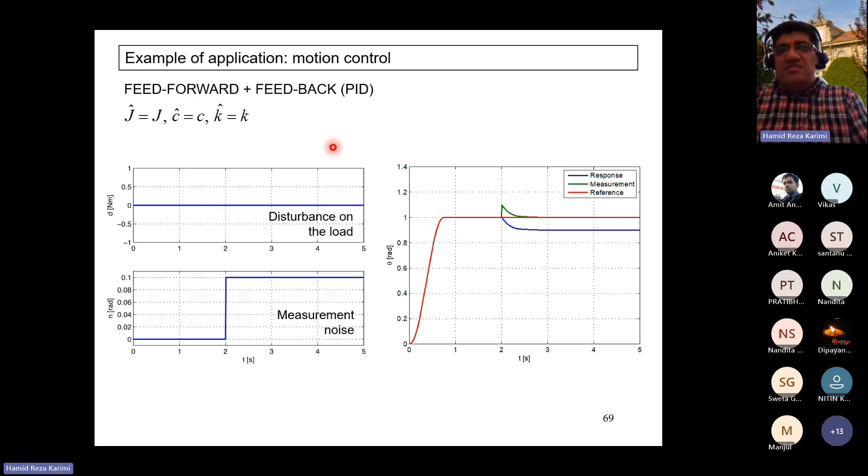Oh, thank you, this is a good question. Actually, when I'm talking about the knowledge, I'm just talking about the physical parameter knowledge of the system. I'm not talking about the disturbance or the noise, because the feed-forward only needs information of, for example in this case, the G hat S. And in this case, only the important information is the physical parameter, like the mass, the stiffness, or damping. So the other parameters, functions, or disturbance noise are not part of that knowledge.

Yes. Okay, sir, thank you, thank you sir. Okay, okay, you're welcome, yes.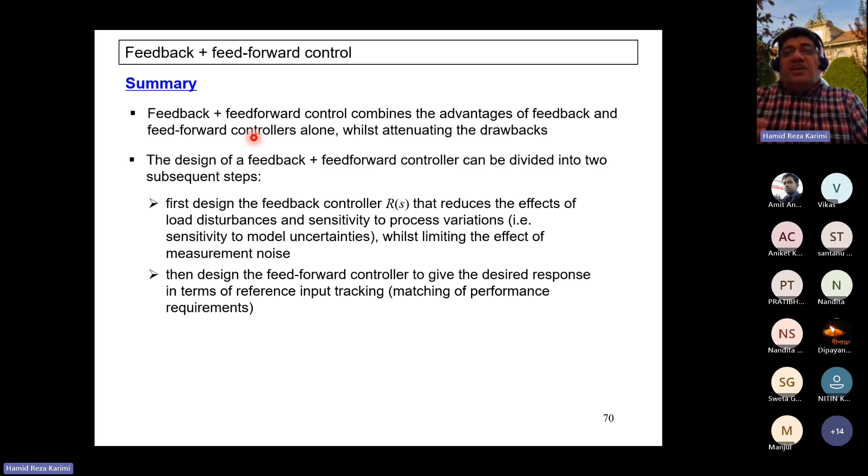Okay, after this discussion about the complexity of the system in control design, we need to look at either the feedback, feed-forward, or the mix of feedback and feed-forward. And application is very important, because I'm not sure which kind of business you want to do currently or in the future. Many industries need the feed-forward control knowledge. And that's it, we can come to the next topic about resilience.

Resilience means that a system at any time is a system of systems. So one keyword here is SOS. The topic of SOS is also part of the CPS, and it means basically we need to pay attention to how we can look at the SOS in terms of resilience. Because the systems are connecting, even across different industrial sectors, the control system complexity basically exists from different aspects as we discussed today.

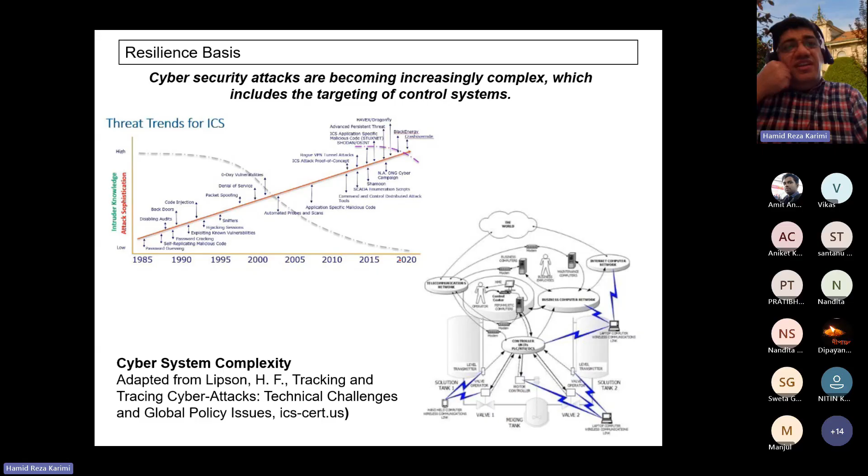We need to include more resilience in the control design. So if you target the complexity in the control system toward a more secure or more resilient control system, you are trying to deal with the complexity of cybersecurity attacks, because it's growing very, very quickly. This means we need to pay attention to these aspects.

If you are interested, in my group we are working on autonomous driving. One aspect is the driver interaction with the machine, not only the physical driver, but also perception and cognition. This means the sensor, actuator, cognition, interaction with the machine, processing, all is a complexity we have.

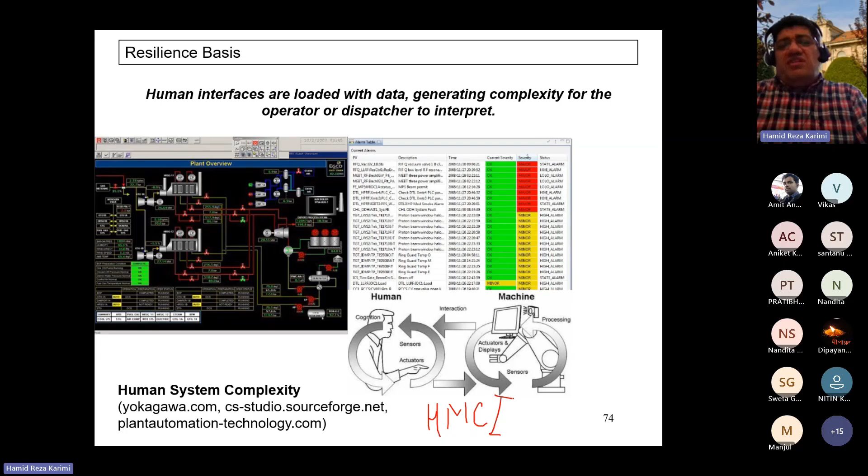Everyone can develop a lot of machine learning tools for car driving, but what is important is the integration of cyber security with machine learning or AI in autonomous cars, because here we are talking about HMCI, human machine cognition interface, and this brings a lot of complexity in the resilience case.

For a multi-agent system, because the agents are collaborating and competing, you need to control the different layers of the agent. At the different layers, you need to control that. How to stabilize — these are some issues we have in the resiliency of control.

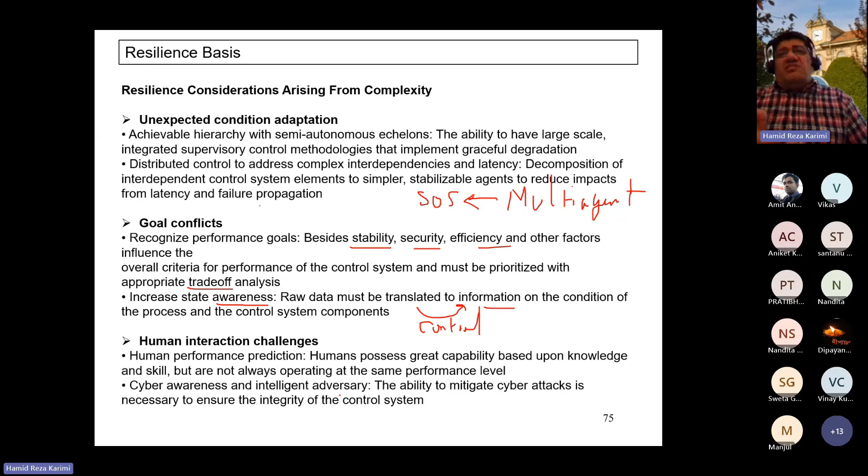Another topic about HMCI is human interaction. As I told you, Industry 5.0 is exactly about this topic: human performance prediction, cyber awareness, and intelligent adversary. So now you see that in the resilience context, there is a lot of consideration we need to pay attention to.

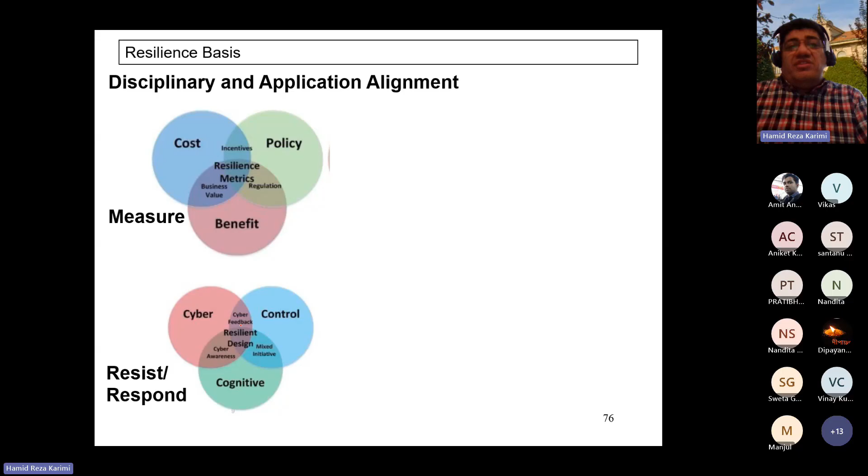So now the capacity of the control, the resilient control, and how to keep the state awareness - this is one of the important challenges, because for resilience you need to enhance the reliability, and you need to look at your reliable information.

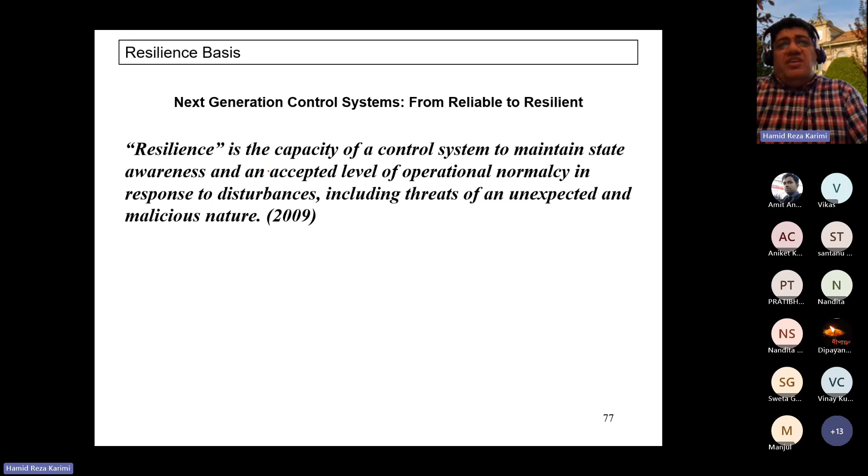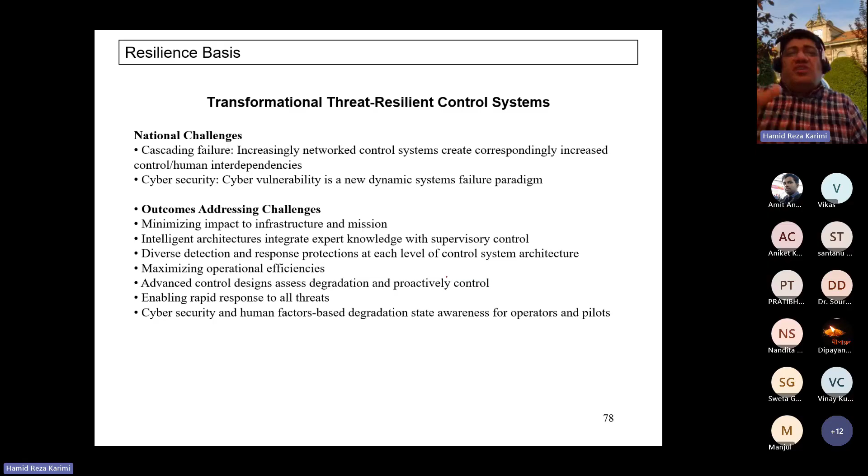And this means one of the important parts is from control, and we try to discuss it briefly, because reliability is a very important topic in resilient control, since we are talking about data translation.

Of course, we can discuss more details for each part. So if there's no question, I need to switch to another topic, because we have another topic prepared for today.